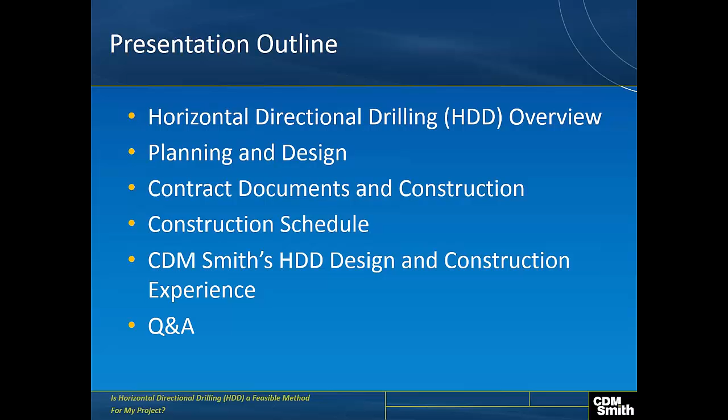Let's start with the horizontal directional drilling overview, or HDD overview. What is horizontal directional drilling? Horizontal directional drilling is one of those trenchless methods. This method was developed in the 1960s by the oil and gas industry. HDD typical applications are installation of gas lines, cables, electrical conduits, water pipelines, and sewer force mains.

What is the practical range for HDD? Pipe diameters ranging from 2 to 60 inches can be installed via the HDD method. The crossing length can range from a couple hundred feet to a few thousand feet, typically over 10,000 feet. In terms of ground conditions, HDD operation is favorable in sandy, clay soils and in rock. However, subgrades that contain man-made obstructions, boulders, or weathered rock are not recommended for HDD operations.

But this does not mean that the HDD method cannot be used for your project. You may have to take additional steps or additional evaluations to ensure that the HDD method can be used under these conditions.

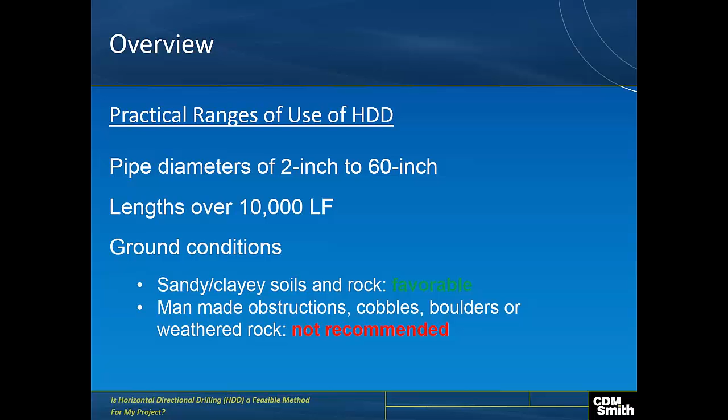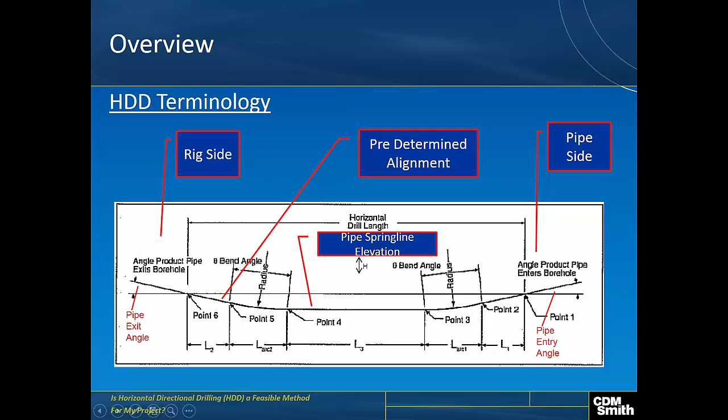How is HDD done? HDD is performed by drilling equipment that is capable of being maneuvered horizontally and vertically while drilling, to direct the path of the crossing along a predetermined bore path. As you can see on this slide, the HDD method has 3 steps: pilot hole drilling, hole enlarging or reaming, and the pipe pullback.

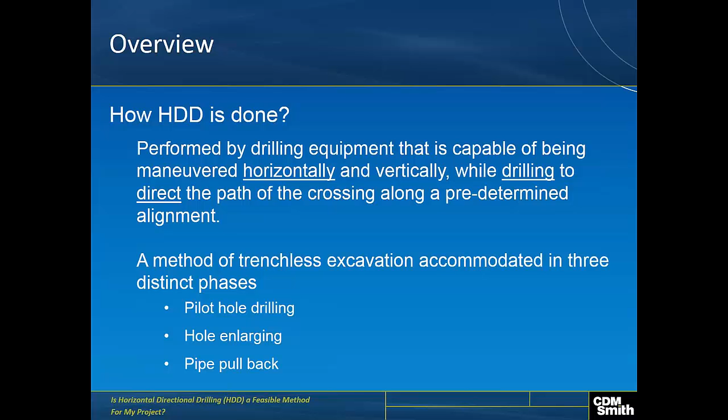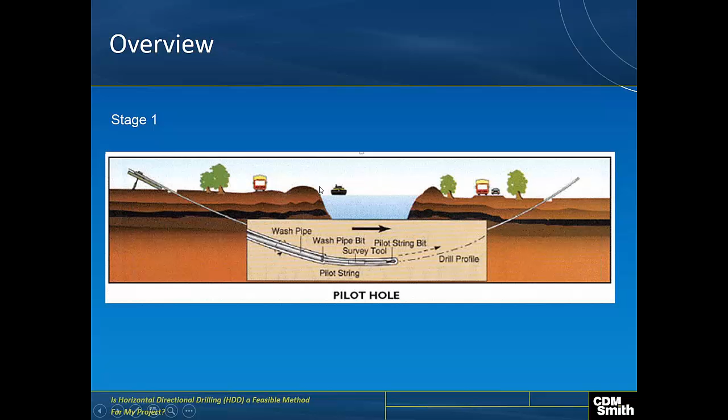This is the first step, pilot hole drilling. How can we do this? Place a rig on one end of the alignment and start drilling the pilot hole. Pilot hole diameter varies, typically from 4 inches to 12 inches.

The second step is hole enlarging or reaming. Reaming typically starts after the pilot hole is done. What is the purpose of reaming? The purpose of reaming is to enlarge the borehole to the required diameter to facilitate the installation of the product pipe. How do you estimate the required diameter? The rule of thumb is to enlarge the borehole diameter to 1.5 times the product diameter. This rule applies to pipe diameters up to 24 inches.

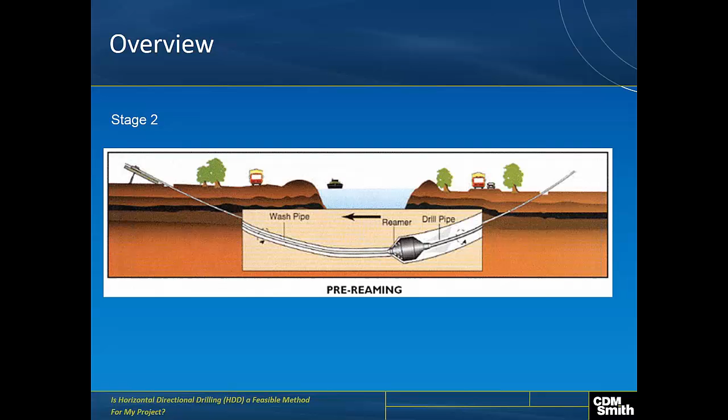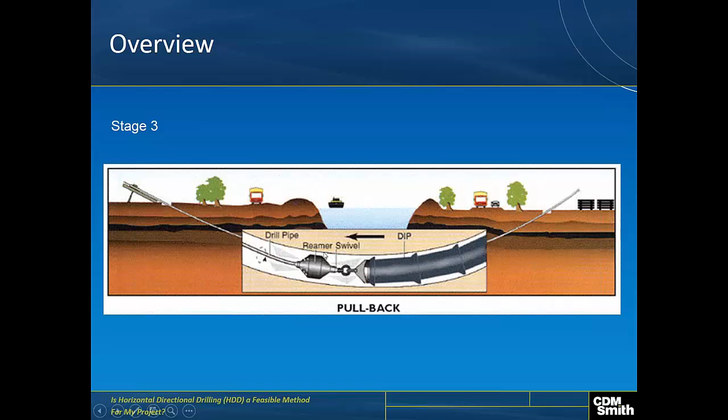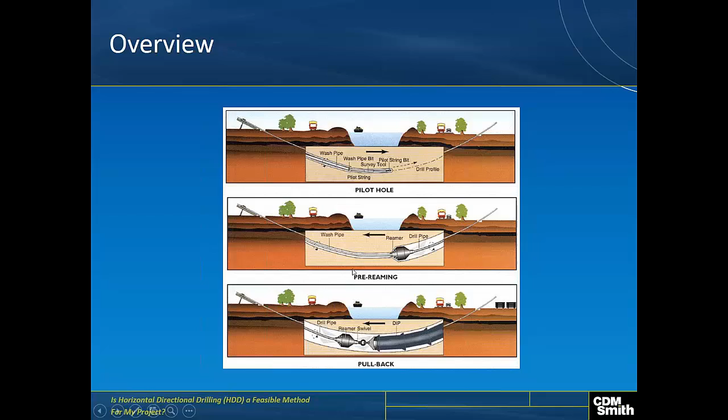The next topic is planning and design. Let's see what goes into planning for an HDD job. In my view, the planning stage for an HDD job is very critical to the success of the project.

As you can see, there are many things on this list. You need to do a route evaluation and land use evaluation. You need to understand where the potential wetlands are. You need to obtain easements for the project. You need to obtain the required permits. There are a lot of permits usually for an HDD job. You need to understand where existing utilities are.

These are some of the prime concerns when we plan for an HDD job. You also need to identify if there are any man-made obstructions, such as foundations or bulkheads, along the proposed alignment. Usually, if you have to go across a river, you might have some piles or bulkheads, so you want to make sure you identify those locations. This is also very important.

You need to conduct a desktop study. In addition, you should have a good handle on the project requirements. This means the approximate length of the crossing, pipe type, internal pressure of the pipe, and the pipe diameter.

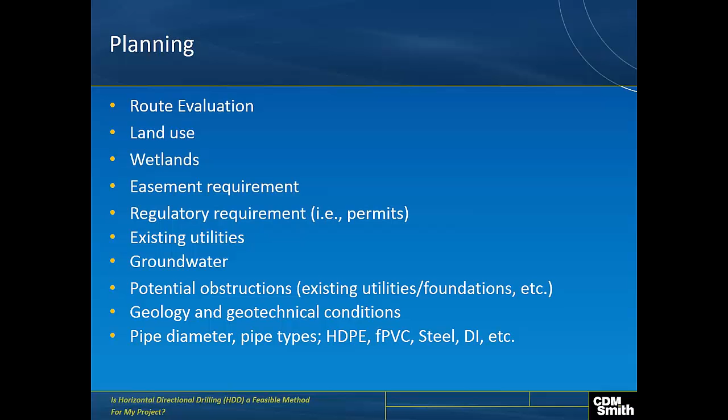Speaking of a desktop study, what is the purpose of this study? The intent of a desktop study is to find information on geology in the project area and existing information near the project site. For example, you can check USGS maps, which would help you get an idea about the subgrade along the proposed alignment. You can also look for construction records near the project site to see if any geotechnical boring information is available.

In addition, I would conduct a field reconnaissance. If making a site visit is difficult for some reason, you can take a virtual tour around the site using Google Earth. This would help you identify potential site constraints such as overhead lines, bulkheads, or foundations. Also, this would help you identify potential work areas for the project, such as areas for placing the rig and for laying down the pipe.

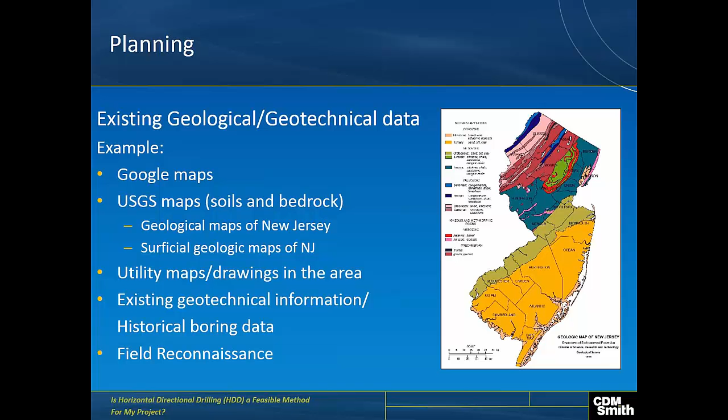Typical pipe types for HDD use are fusible polyvinyl chloride or fusible PVC pipe, high-density polyethylene or HDPE pipe, steel pipes, and ductile iron pipes. But each pipe type has limitations based on their operating requirements: pipe length, pipe diameter, internal pressure, corrosion requirement. So you need to look at these things when you're planning for an HDD job.

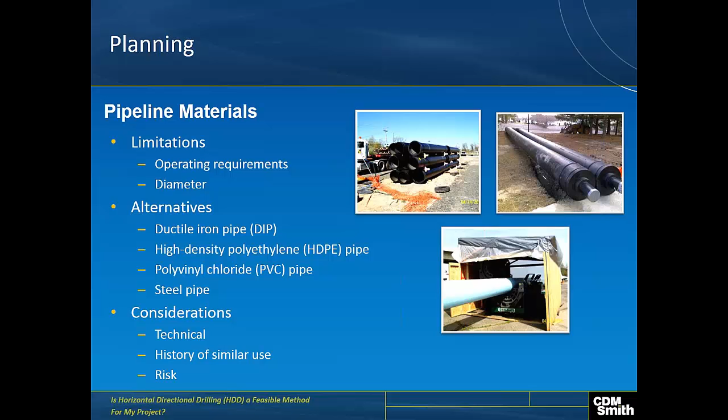After a desktop study, you should have a good idea about the anticipated subgrade condition along the proposed alignment, so you'd be able to plan a subsurface investigation that would supplement the existing information. Otherwise, you've got to plan on drilling an adequate number of borings to obtain the required information for the design.

One important note: no boring should be taken right on the HDD horizontal alignment. The reason is that we want to avoid any potential frac out conditions during the HDD construction.

Let me briefly discuss what frac out is. Frac out is an inadvertent return of drilling fluid to the ground surface or to a water body. Typically, a frac out is not allowed by environmental regulations enforced by most states, so we must take necessary steps during design to avoid this from happening during construction.

Let me get back to our discussion on subsurface investigation. Once the subsurface investigation is done, the next step is to select samples for lab testing. Typical soil testing would include grain size analysis, Atterberg limits, and organic contents. If cohesive soils are encountered, you may want to do triaxial tests.

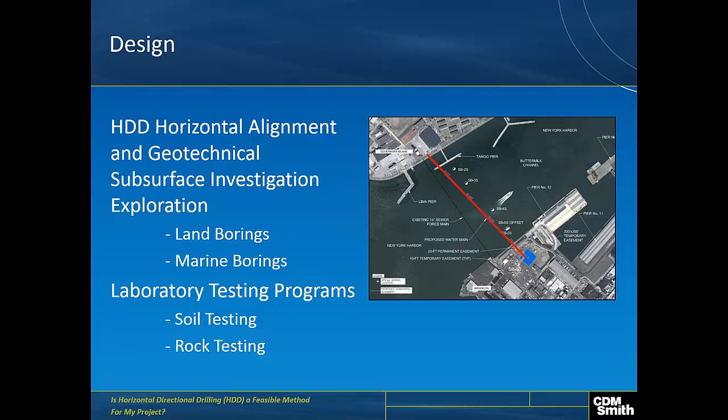Okay, let's discuss HDD design components and what is involved in an HDD design. HDD design would include developing a subsurface profile, preparing a geotechnical data report, conducting frac out analysis, establishing the HDD vertical alignment, estimating pullback forces, and also conducting pipe stress evaluation.

Typically, pipe stress evaluation includes two types of analysis. These are applicable for plastic pipes, fusible PVC or HDPE pipes: estimating axial tensile stresses and estimating ring deflection, both short-term and long-term.

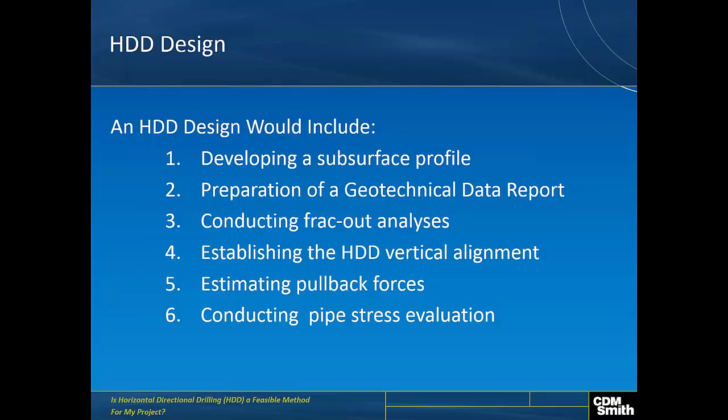We typically develop this profile on a one-to-one scale because it helps us understand the subgrade, especially to understand the areas that might give us potential troubles during construction.

What do I mean by understanding the areas with potential troubles? When we evaluate the subgrade, we would like to identify if there are any areas that may contain loose soils, gravel zones, cobble zones, boulder zones, or potential voids along the proposed alignment, because those conditions may not be favorable for HDD drilling. So we want to identify solutions during the design, so those solutions can be incorporated into the design in a way that would mitigate potential construction difficulties down the road.

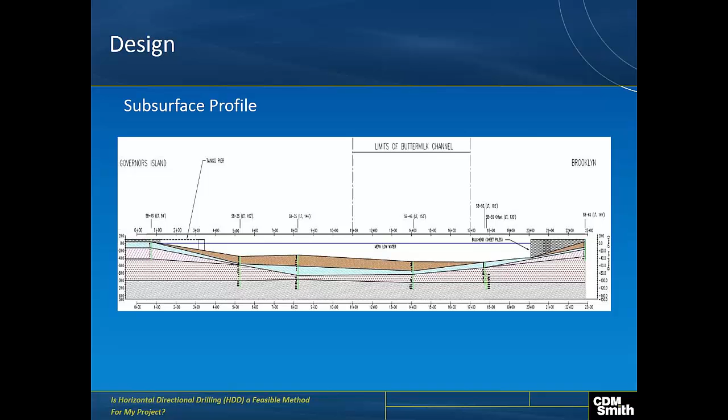Let's discuss the Geotechnical Data Report, or GDR. Typical GDR for an HDD project includes a few sections: table of contents, background, project datum, description of soil classification system, or if you have rock, you need to talk about the rock classification system, and also description of drilling and sampling procedures and lab testing procedures.

Also need to provide boring logs. Usually we develop these boring logs on gINT software, and also you need to include the data from lab testing as appendices.

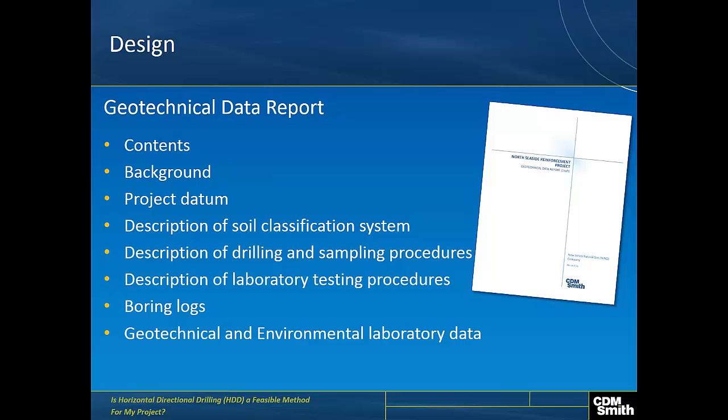Once the GDR and the subsurface profile are complete, the next step is to conduct frac-out analysis. To conduct frac-out analysis, we select critical sections along the HDD alignment, and also select an initial depth for the pipe spring line. We used a computer software 2D finite element program to conduct this frac-out analysis, but you can do hand calculation; there are methods to do that.

And if you have 2D software like GeoStudio or GeoSlope Suite or something, you can use that. Once the model is developed with soil parameters...

The short answer is you can lower the pipe spring line, or in other words, increase the soil overburden thickness over the pipe. Then rerun the model until no frac-out condition is observed. This analysis is kind of an iterative process because we have to find the optimum elevation for the pipe spring line, as the project cost can go up with the increase of soil overburden thickness over the pipe.

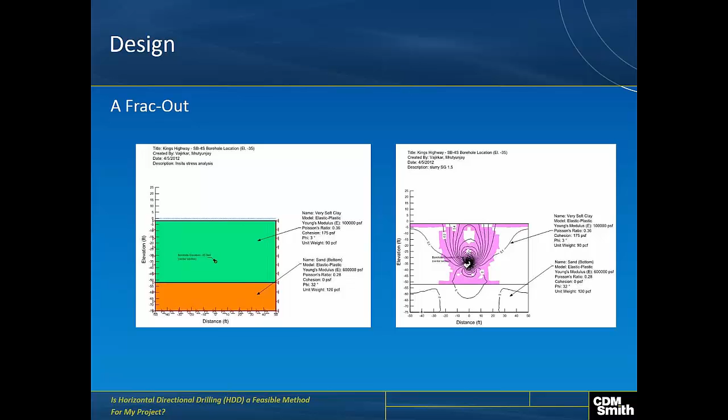Let's see what is involved in developing the HDD vertical alignment. After the subsurface profile evaluation, we have an idea about the subgrade zone that is favorable for HDD drilling. After the frac-out analysis, we have an idea about the subgrade zone that is free of potential frac-outs. So we use this information to identify the preferable vertical window for placing the pipe springline.

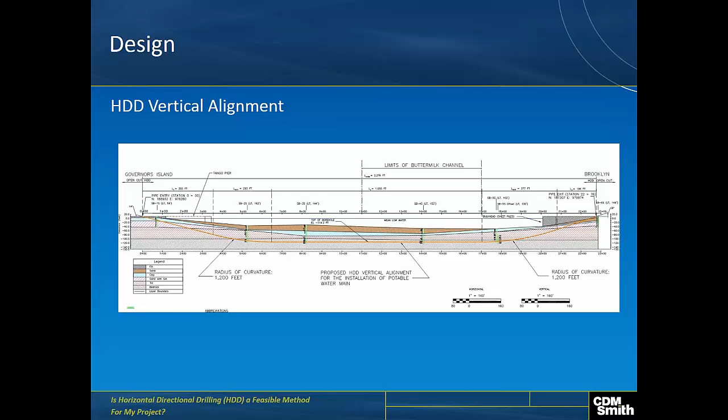Then we select entry angle, exit angle, radius of curvature to develop the HDD vertical alignment for conducting the remaining parts of the HDD design. What are those remaining parts? Estimating pullback forces and conducting the pipe stress evaluation, such as axial tensile stresses and ring deflection.

The pullback force evaluation and the pipe stress evaluation involve complex calculations because they require not only the understanding of the soil or rock behavior, but also the understanding of the pipe material behavior and the soil-pipe interaction behavior. Several design guidelines are available for estimating pullback forces and conducting pipe stress evaluation.

As shown on this slide, there are guidelines such as ASTM guidelines, PPI guidelines (Plastic Pipe Institute), and ASCE guidelines. Also, the North American Society for Trenchless Technology has published guidelines such as HDD Good Practice Guidelines.

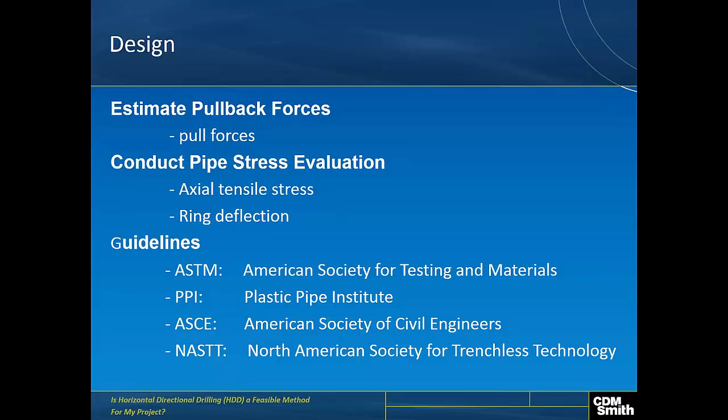The next topic is contract documents and construction. Contract documents include drawings, specification, and the geotechnical data report.

Typically, drawings would include a plan view that shows the HDD horizontal alignment and a profile view that shows the HDD vertical alignment. The HDD vertical alignment should show station at start, station at end, entry angle, exit angle, radius of curvature, pipe springline elevation, pipe diameter, and pipe type.

Regarding specifications, the HDD portion of the project would include HDD specification and pipe specification. You also have to have a front end. You can talk with your PM about what front end document should be included for the project.

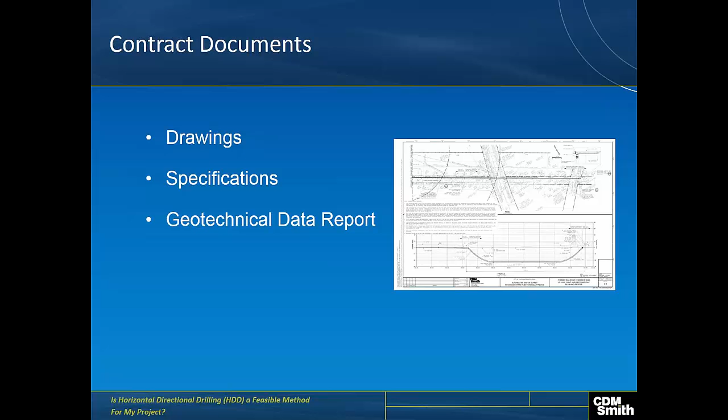The next topic is HDD construction. HDD projects can be design-bid-build or design-build.

Design-bid-build scenario would include the client, the engineer, and the general contractor or the HDD specialty contractor and the pipe supplier. In my view, the HDD specialty contractor's experience would play a big role in the success of the job, but the trick is to find an experienced HDD contractor who is familiar with the geologic condition of the area where the project is, and who also has a good track record in HDD construction.

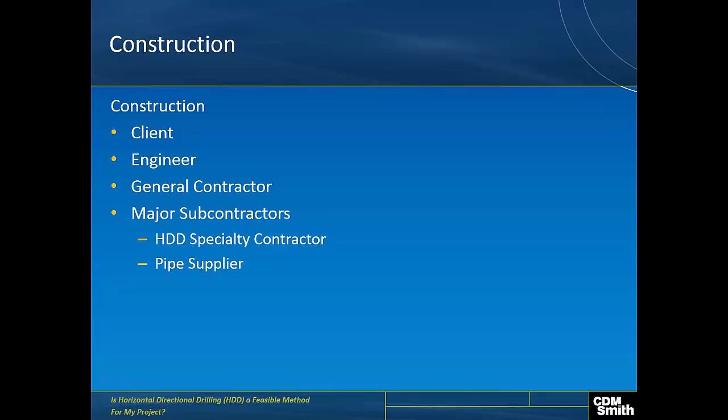Let's discuss some of those recommended activities that we would do prior to the construction. In my view, having a pre-construction meeting with the contractor is useful because this could discuss safety, potential risk, any modifications to the design, coordination matters, who is talking to whom, and the submittal review process.

Also, this is an opportunity for you to ask questions prior to the start of construction and try to get answers from the contractor.

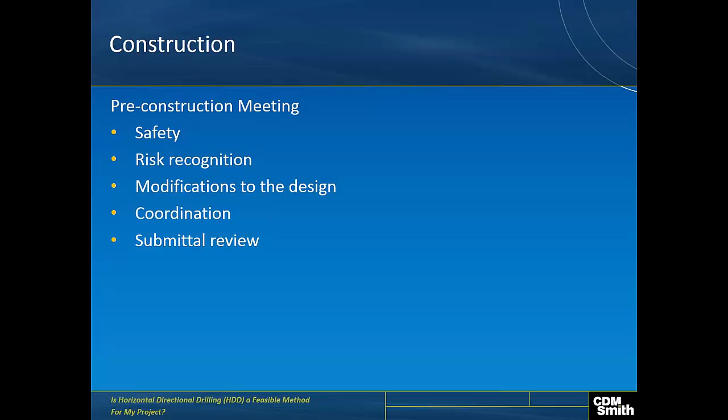Prior to reaming, we would like to have another meeting, also prior to pullback. Once the pullback is done, you can have another meeting prior to testing.

This is one of those requirements that one should include in the HDD specifications. You have to have this requirement in the specification, because otherwise the contractor won't listen to you even if you want to conduct these meetings.

If the project is a complex one, I would recommend having these meetings in the field trailer, face-to-face with the contractor. If it is a less complicated job, you can do this via teleconferencing.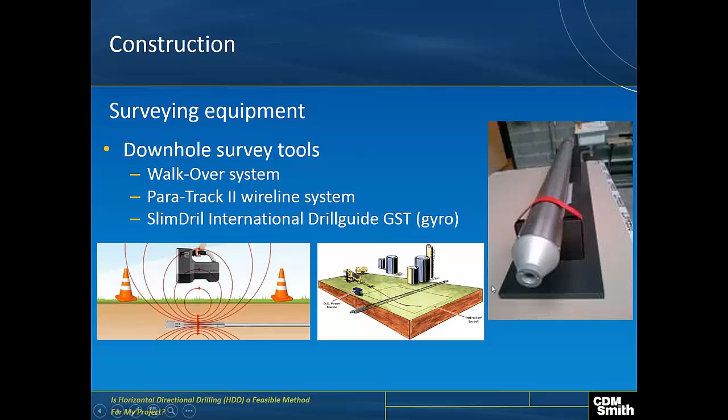This is an illustration of a pilot hole drilling.

I would recommend including language in this spec that the contractor would provide you daily logs and records like this one at the end of each workday. Also, you want to make sure that you get them reviewed by the design team in a timely manner to see if there are any red flags.

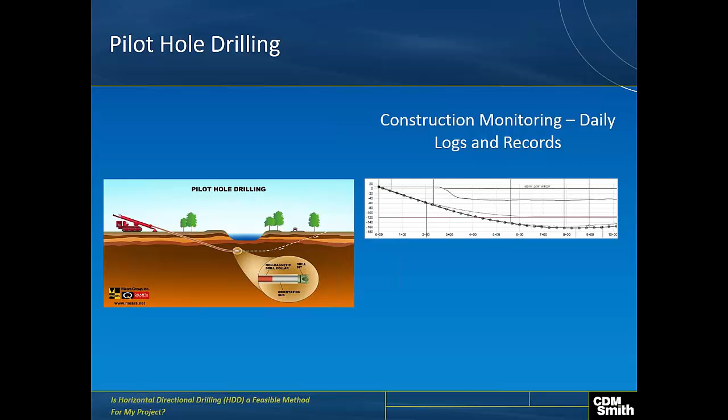This slide shows reaming. Reaming can be done using a single pass or using reamers in tandem. These are some pictures of those reamers. This is a single pass reamer. These reamers are reamers in tandem.

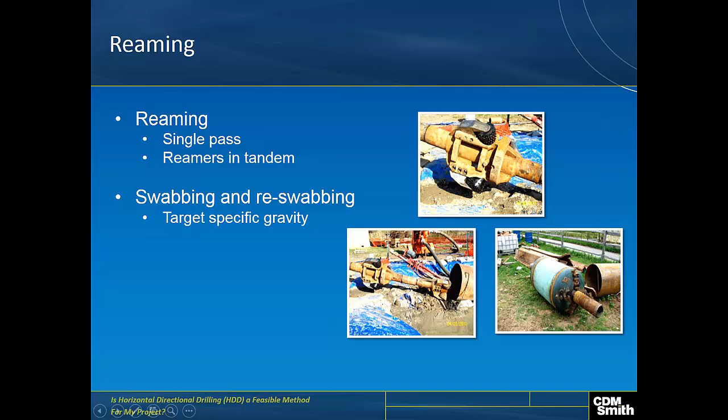This is an illustration of a pullback, pipe pullback, and this picture shows the pipe pull head, and this picture shows pipe staging, and this is a pipe fusion machine, where you can assemble pipe strings.

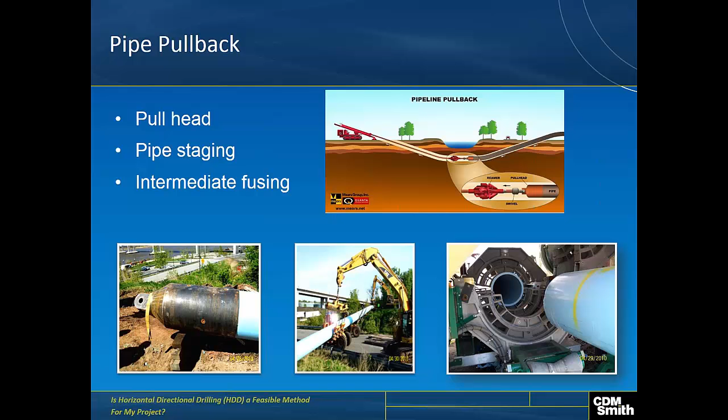This slide shows a summary of construction activities. As I mentioned earlier, this is the pipe side and this is the rig side. These activities are typically conducted on the pipe side, and these activities are typically conducted on the rig side. One important note to remember: the contractor should carry out both of these activities at the same time so the project can stay on schedule.

This means place the rig on the rig side, drill the pilot hole, and ream the borehole to the required diameter, and at the same time the contractor should start fusing the pipe in order to make the pipe strings. Once the strings are complete, he has to do a low air pressure testing. Once the testing is done, these pipe strings should be staged for the pullback.

This picture shows a typical pullback operation. Typically, pullback is a continuous operation if the project includes only one pipe string. But sometimes you would need to assemble a few pipe strings due to an insufficient staging area. In such case, pullback would have to be stopped to attach those pipe strings together.

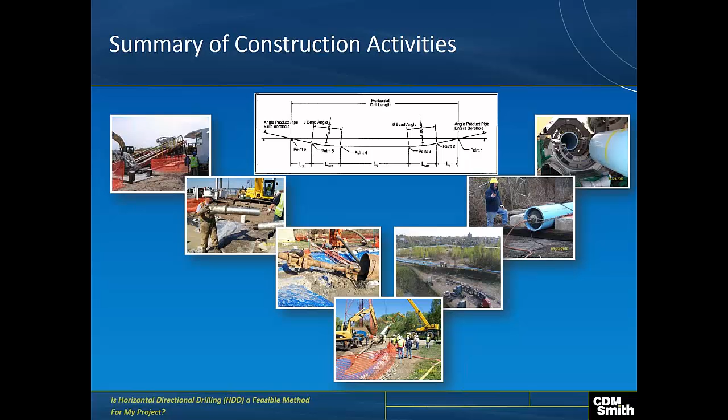The next topic is construction schedule. Let's see what is included in a typical HDD schedule.

You would need to obtain permits for the construction. This permit process may take up to 6 months depending on the location of the project. Preparation of contract documents may take up to 3 months. This would include planning and executing a subsurface investigation, preparation of a geotechnical data report, conducting the HDD design, and preparation of the contract documents.

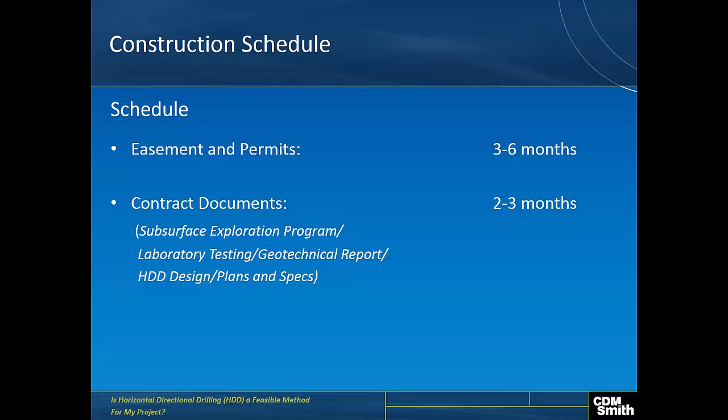This slide shows a typical HDD construction breakdown. Typical mobilization takes about 5 to 8 days depending on the size of the job. Pilot hole drilling production rate varies between 100 to 250 feet a day, and I'm talking about this pilot hole production rate in soils. It depends on the type of soil; it may go between 100 to 250 feet a day.

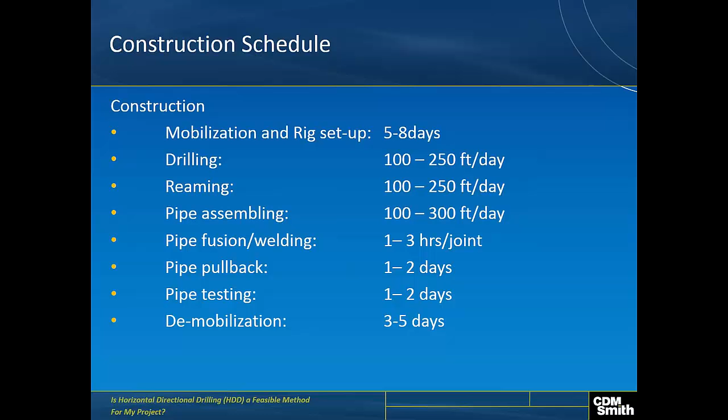We usually assume the same production rate for reaming. If you have to make a schedule, I would assume the same rate for reaming. Pipe assembling may go between 100 to 300 feet a day, and pipe fusion can take about 1 to 3 hours per joint depending on the pipe diameter. Pipe pullback takes about 1 to 2 days. Also, pipe testing takes about 1 to 2 days, and demobilization takes about 3 to 5 days.

The next topic is CDM Smith HDD design and construction experience. We, CDM Smith, have been involved in designing many HDD projects throughout the country. I have selected a few projects for this webinar to show you the HDD design and construction aspects.

The first project that I am going to discuss was completed in New Jersey. Crossing length was about 5,360 feet. Pipe type was fusible PVC, DR18, 24 inches in diameter. The total construction cost was about 4.7 million.

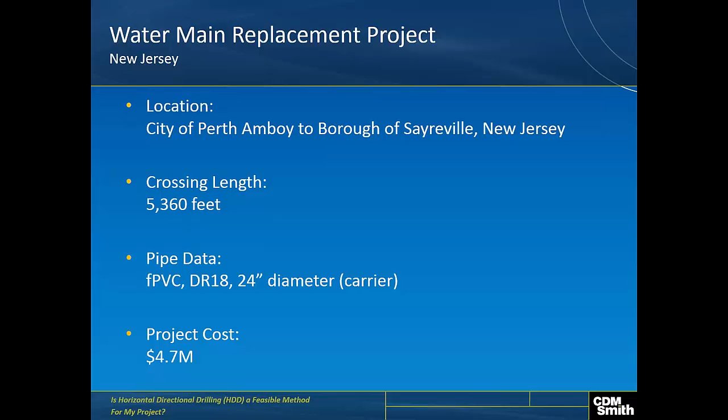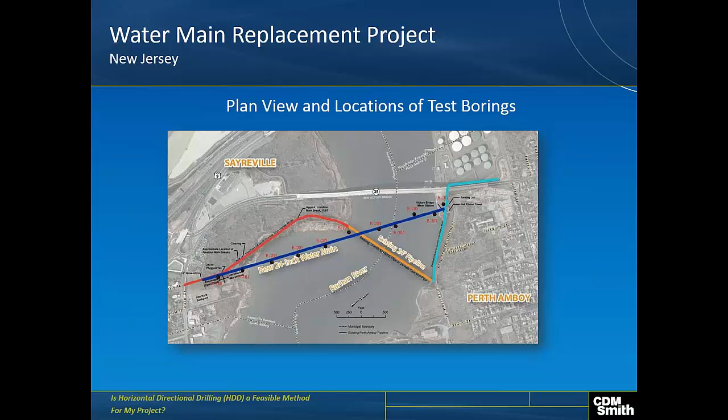This slide shows the HDD horizontal alignment. This is a blue line. As you can see, we took 11 borings: 3 borings were on land and 8 borings were over water. After completion of the geotechnical investigation program, we developed a subsurface profile along the proposed alignment.

We ran a frackout analysis to understand the preferable vertical window for placing the pipe spring line. Finally, we decided to place the pipe spring line at elevation -60. We designed the HDD vertical alignment using entry and exit angles of 8 degrees. After that, we ran the pullback calculation to estimate the pullback forces.

For the calculation, we initially assumed that the pipe was empty during the pullback. The results indicated that the estimated pullback forces would exceed the manufacturer's recommended pullback forces for the respective pipe type. Typically, plastic pipes, when they are empty during the pullback, would contact the borehole walls due to buoyancy. This would increase the friction acting on the pipe, and as a result, pullback forces will go up.

So what are the choices that you have during the design to address this issue? The choices are: use a stronger pipe or ballast the pipe. Let me explain what these are. A stronger pipe means a pipe with a thicker wall, and a thicker wall means higher recommended pullback forces by the manufacturer.

Ballast means filling the pipe with water during the pullback. This is a method to keep the pipe centered in the borehole so it would not contact the borehole walls, which would reduce pullback forces due to less friction. We decided to go with ballasting the pipe because it was cheap, and ran the calculation. Finally we selected DR18 fusible PVC pipe for the project.

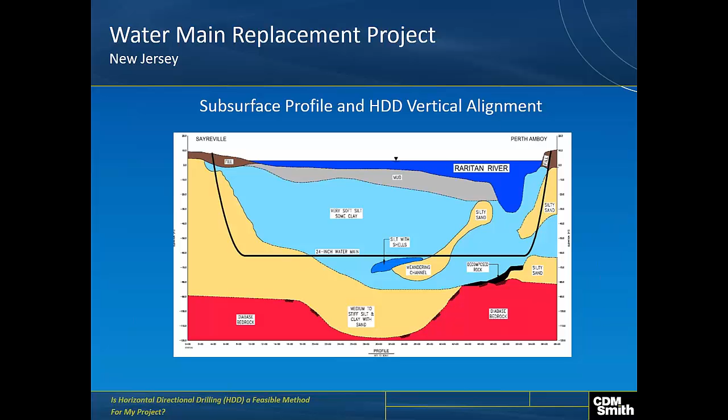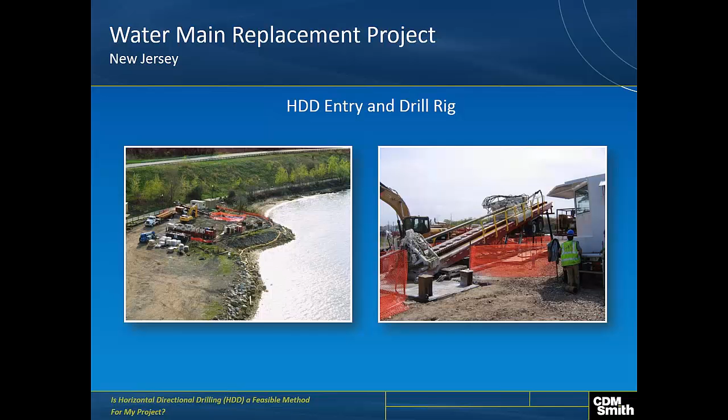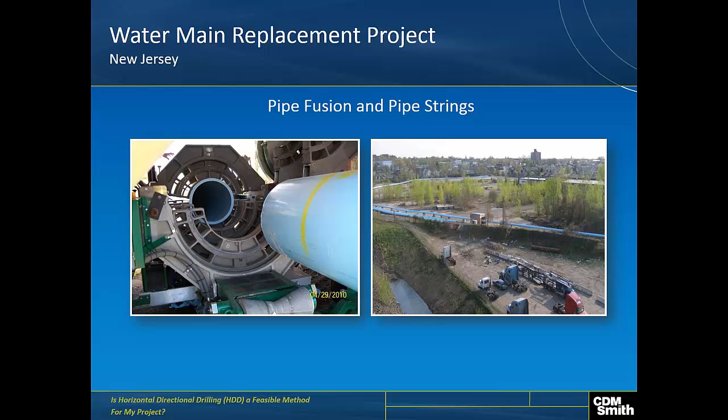This is the pipe fusion machine that we used to assemble the pipe strings. This picture shows the pipe strings staged for the pullback. We had to prepare 4 pipe strings because the available pipe laydown area was not large enough to accommodate the full length of a single pipe string. This meant we had to stop the pullback operation 3 times to attach those 4 pipe strings together, and each stop took about 2.5 to 3 hours.

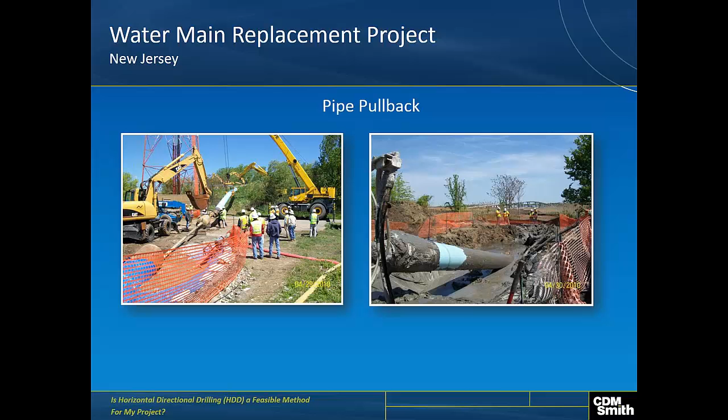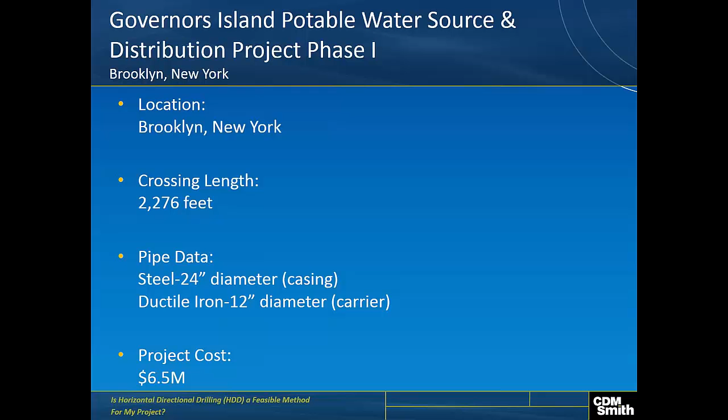First we installed the casing pipe, which was steel, 24 inches in diameter. Then we installed the carrier pipe, which was ductile iron, 12 inches in diameter. The total construction cost was about 6.5 million.

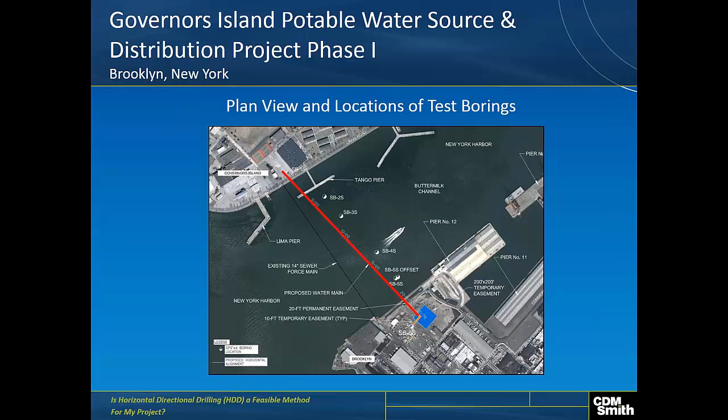After completion of the geotechnical investigation program, we developed a subsurface profile along the proposed alignment. We ran frac out analysis in order to understand the preferable vertical window for placing the pipe spring line.

Finally, we decided to place the pipe spring line at around elevation minus 120, which was in rock. This rock was Manhattan schist. We designed the HDD vertical alignment using an entry angle of 18 degrees and an exit angle of 14 degrees. The radius of curvature was 2,400 feet.

Typically, the radius of curvature is a function of the drill pipe diameter, but in some cases it is a function of the pipe material. This is one of those cases where the pipe material governs the radius of curvature design. The casing material was steel and the pipe diameter was 24 inches. For steel pipes, the rule of thumb is to use 100 times the pipe diameter to estimate the radius of curvature. So we established the HDD vertical alignment using a radius of curvature of 2,400 feet.

Using this HDD vertical alignment, we ran the pullback calculation. The results indicated that the estimated pullback forces would exceed the manufacturer's recommended pullback forces. So we decided to ballast the pipe.

Since steel pipes are heavier than plastic pipes, we knew we would not have to ballast the pipe 100% of its volume. So we ran pullback calculations assuming 25%, 50%, and 75% ballast in order to find the optimum case for ballasting the pipe. Finally, we decided to go with 50% ballast for the pipe pullback.

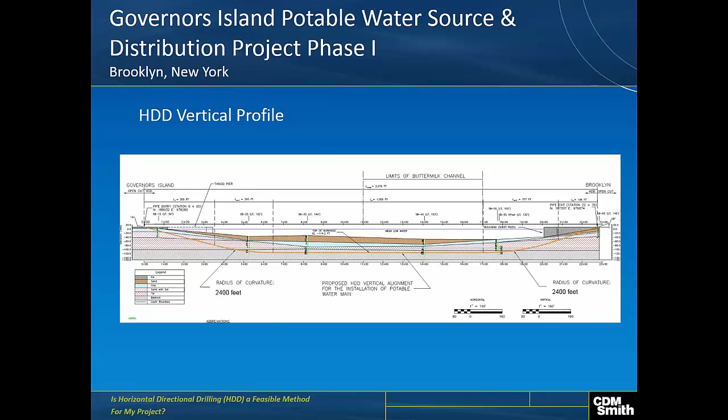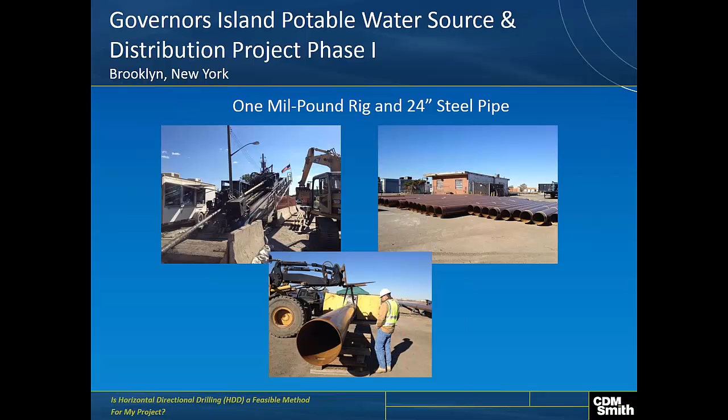The third project I am going to discuss is an ongoing HDD project in New Jersey. This is a design build project that we have teamed up with an HDD contractor on. This project includes installing a new gas main via HDD. The pipe diameter is 12 inches, and the crossing length is about 14,400 feet long. The total design and construction cost is about 12.2 million.

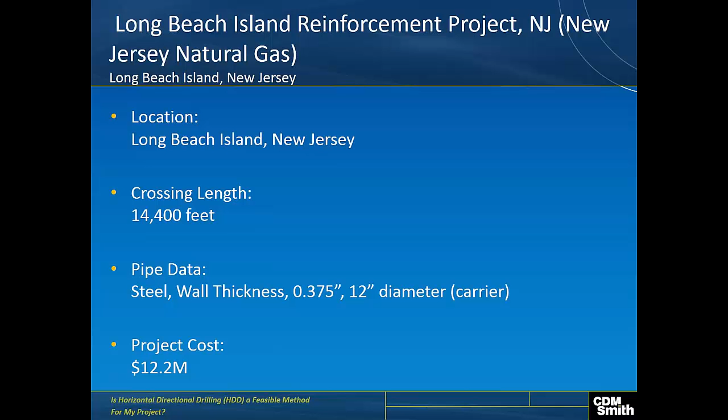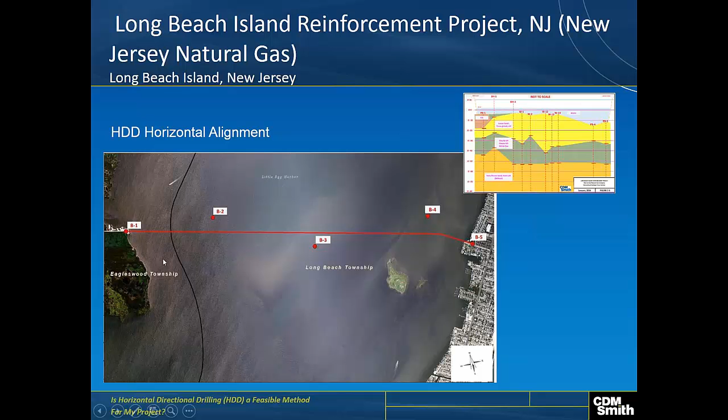This slide shows the HDD horizontal alignment. Through a desktop study, we could find existing boring information from a nearby bridge construction. Based on that information, we developed this subsurface profile, so we kind of knew what to anticipate along the proposed alignment. We decided to take 5 borings to supplement the existing geotechnical information we had. 3 borings were over water and 2 borings were drilled on land.

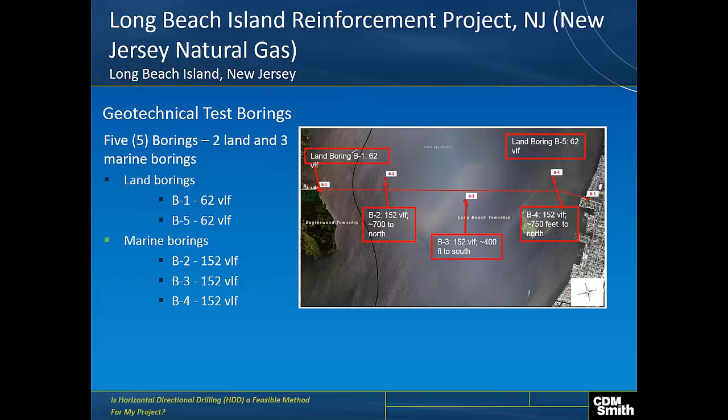The plan is to construct the first HDD segment, then move on to the second HDD segment. Once these 2 segments are done, the plan is to connect them together in the middle of the bay using a steel cofferdam. For the first HDD segment, we also plan to place a rig on one end of the alignment and another rig in the middle of the bay. Then we plan to do an intersect drilling.

Let me explain what intersect drilling is. This means the pilot hole drilling would start from both ends of the HDD segment. So one hole is going this way, the other hole is going in the opposite direction. The idea is to meet these 2 drill heads somewhere in the middle of the alignment and make one long drill string. Once the pilot hole is done, we can start reaming.

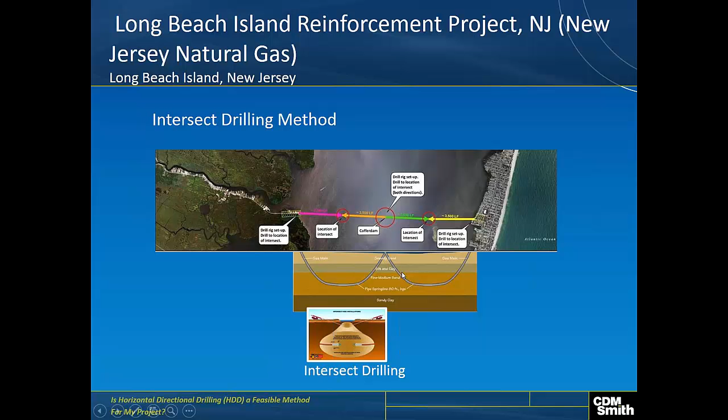We ran a frac-out evaluation and decided to place the pipe spring line at around 60 feet below the mud line. We used 14 degrees for entry and exit angle, and 1,200 feet for the radius of curvature to design the HDD vertical alignment. This slide shows the respective HDD vertical alignments. We have two segments: this is segment 1 and this is segment 2.

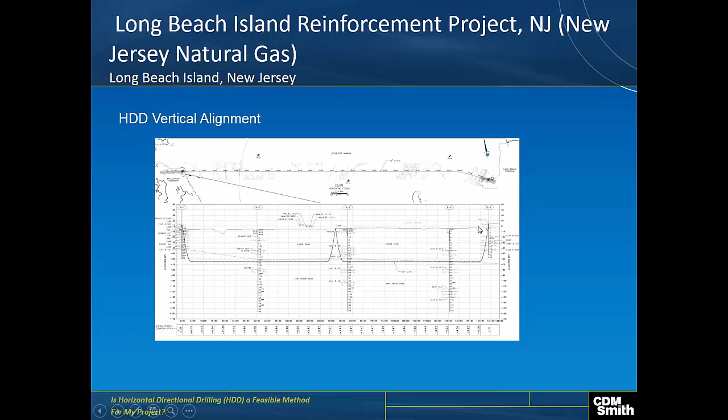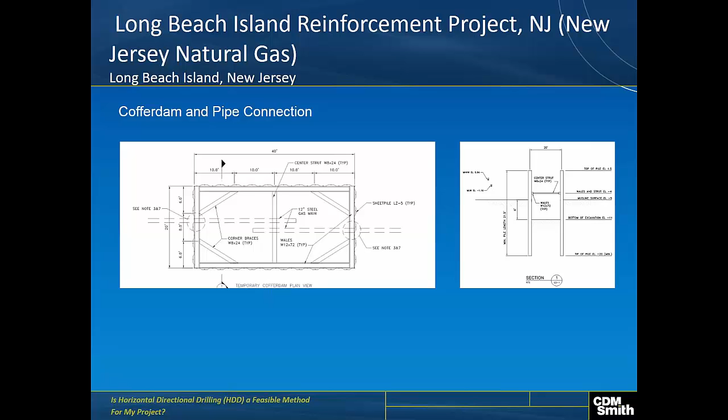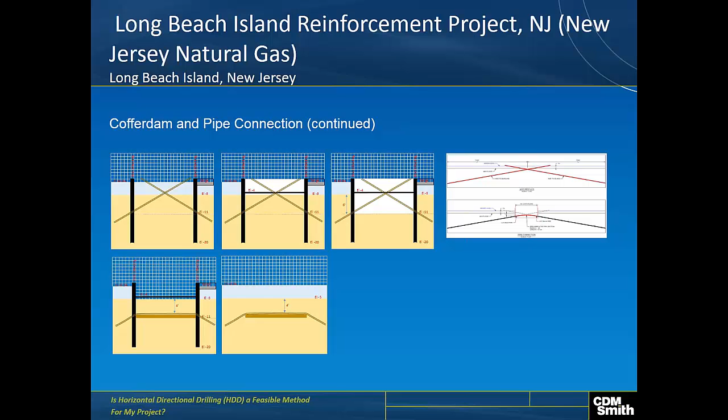This concludes the webinar on HDD. I hope that you enjoyed the webinar. Hopefully this will be useful for you to plan your next HDD project. If you have any questions, please feel free to ask.